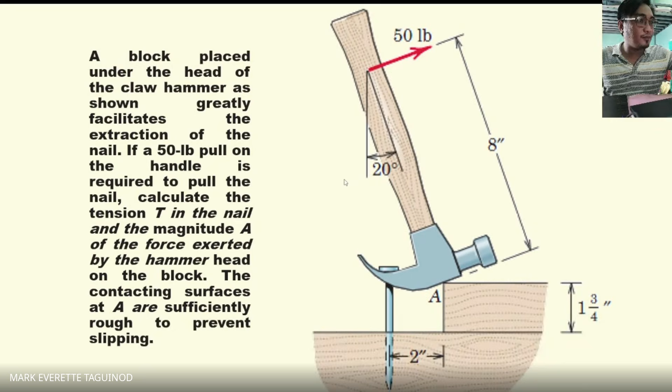Ngayon, let's just continue. Natapos na ba natin 'tong problem na 'to? Did we already finish this problem? Yes, okay. So eto okey na rin ata. Dito tayo nag-last.

Wait lang, let me just move it, nakita na ba? Okay, nandito na yung problem. Ngayon, malamang sa malamang, ang mangyayari niyan, kunyari ito yung quiz nyo, ito yung exam ninyo. Malamang ma-overwhelm na naman kayo dun sa drawing, no? So again, sa mechanics kasi kahit sobrang complicated ng drawing, kahit medyo malabo o mahirap o hindi nyo maintindihan yung drawing, it all boils down to you making or creating yung tamang free body diagram. Kasi again, pag tama ang free body diagram mo, walang magiging problema sa solution mo.

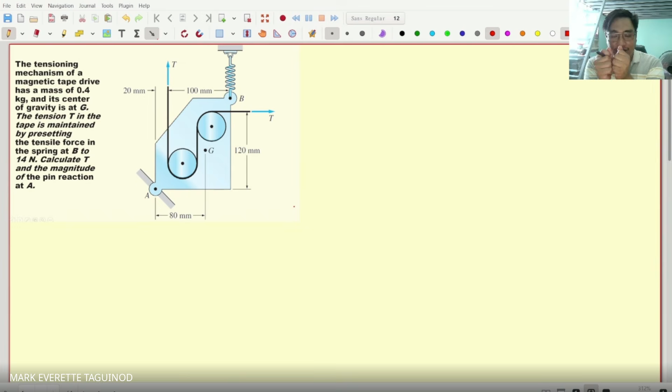Pagka gano'n, sabi niya merong spring dito sa B, so pag meron kasi tayong spring, a spring acts like a cable, pero ang difference lang sa spring at saka sa cable, ang spring meron siyang expansion, meron siyang change in length. Kasi isipin mo ang isang spring pagka binanat mo, it will resist that tension force, pero while resisting it also gives elongation, nag-e-elongate siya. So yun yung tinatawag nating K o yung spring constant.

So pag eto yung problem, let's just replace it with a force that is equivalent or has the same rotation dun sa kanya. Wait lang, palakihin nga natin, patabain natin para mas makita. Okay, so this is my force T, this is my tension or my spring. So tawagin na lang natin 'tong tension or spring tension, TS, tension of the spring. Ngayon sa baba naman meron akong pin dito.

Ngayon sa pin, alam natin pag pin 'yan, the force would be something like this. Hindi natin alam kung anong direksyon niya, pero the best way to do it is to just represent it by its components para mas madaling i-analyze. So now I have an X component tsaka a Y component. So eto, meron akong horizontal tsaka meron akong vertical component.

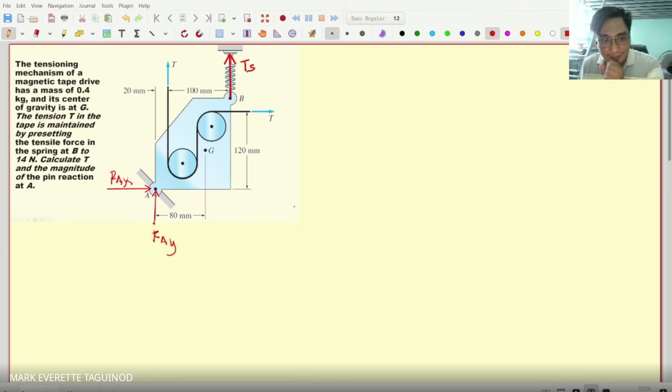Let's just call this RAY kasi vertical, tapos RAX. So yun lang naman, yung tension nakalagay naman na nakalagay na rin dito. So kung bibilangin natin ilan yung unknown, you have 1, you have 2, you have 3 tension, ito parehas lang naman, so that's 3, tapos 4. Pero kung papansin niyo binigay na, may binigay na value. So basahin mo lang ulit yung problem.

Meron tayong hindi pa alam o kulang pa yung equation natin. Pero may sinabi kasi siya dito. Sabi niya, the tensile force in the spring at B is 14 Newton. So para daw magkaroon ng tension T dito, tsaka tension T dito, para maging T na equal sila, yung TS, yung tension sa spring, is set as 14 Newton. So given pala to. So given pala yung tension sa spring na 14 Newtons.

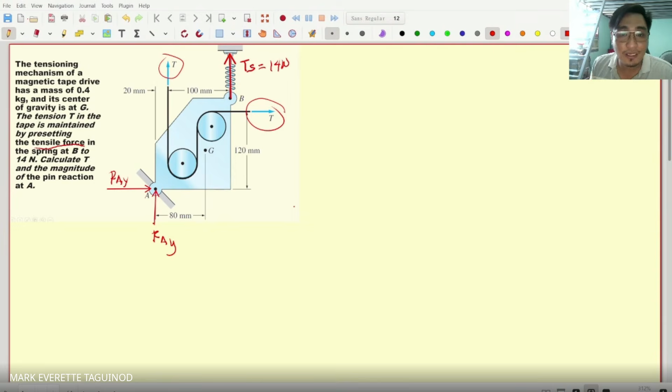So if it's given na 14 newtons ang tension sa spring, ang kailangan lang natin gawin is do the equilibrium equations. Kasi ito na, yung kung anong nasa screen nyo ngayon, palaki natin ng konti para mas makita. Ayan, kung anong nasa screen nyo ngayon, yan na yung free body diagram.

Hindi tinanggal mo yung support, ni-replace mo ng kanyang support reaction. So that's now the free body diagram. Pagka meron na akong free body diagram, it's now as easy as listing what equations that I would use. Punta muna ako dun sa pinaka-basic, summation of forces X is equal to 0, summation of forces sa Y is equal to 0, tsaka meron akong summation of moment at any point, this is equal to 0.

So pag ganyan, tignan natin, bago tayo simulang mag-solve, tignan muna natin kung ano yung pwede nating gamitin na meron tayong masosolve. Kasi kung titignan mo, mag-summation of forces X ako. If I do summation of forces X here, may unknown ako na RAX, may unknown ako na T, so parang hindi pa pwede, dalawa pa yung unknowns ko. Summation of forces Y, meron akong unknown na T along the vertical, meron akong unknown na AY along the vertical. So hindi ko rin masosolve, wala pa akong masosolve gamit doon.

How about moment? If I take moment, let's say at point B. Pag nag-moment ako sa point B, itong tension may unknown, yung RAX meron din siyang moment arm, yung RAY meron din siyang moment arm. So hindi pa pwede, hindi pwede sa B.

Pero what if I take moment at point A? Kasi sa point A, pag nag-moment ako dito, RAX would be passing through point A, RAY would also pass through point A. Therefore, ang moment arm ng RAX at RAY ay 0. So hindi ko na siya isasama sa equation ko. Wherein ang T, may moment arm tong T na pataas, may moment arm tong T na horizontal. So may T dun sa equation ko.

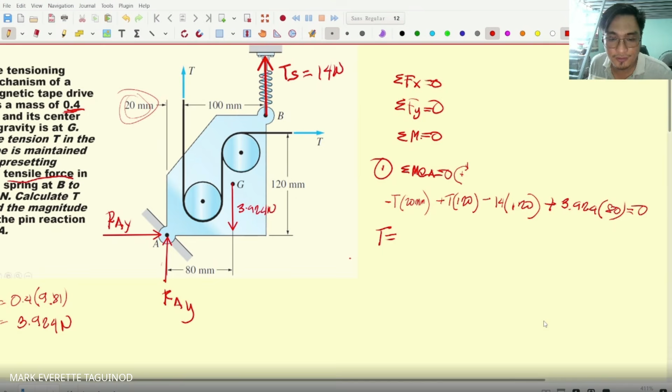Now can someone solve what's the value of T? Calculator nyo na lang, sabay-sabay tayo. Nalabas ko na yung calculator ko. Negative times 20 plus alpha x times 120 minus 14 times 120 plus 3.924 times 80 is equal to 0.

Ano sagot nyo? Anong sagot nyo? What's the answer? Pare-pareho ba tayo? 13 point ano? 13.66. Okay, so this is 13.66, this is newtons. Siyempre kailangan may newton dyan, no?

Okay, answer, that's the answer for the question na T. Mayroon bang kulang? What's the magnitude and the reaction? Anong gagamitin mong combination, yung 2 force or 1 moment? Di check mo na lang. Tapos na ako mag-moment, pag nag-summation of forces X ako, ang unknown ko na lang RAX.

Ibig sabihin gawin ko na yun. Second equation, that is summation of forces along X, this is equal to 0. Ang lalabas dyan, I have positive RAX plus T, this is equal to 0. Wala na, kasi itong T na to vertical, wala yung X component. Itong weight, vertical din, walang X component. Itong TS, vertical din, walang X component.

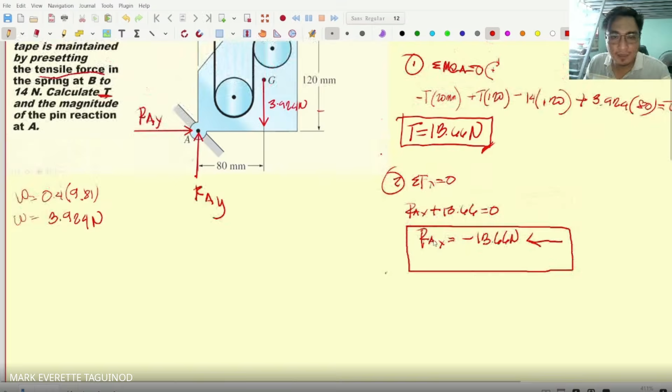Okay, punta na tayo sa kabila. Summation of forces along Y, third equation, this is equal to 0. Ngayon isa-isahin ulit natin. I have positive kasi I assume going up, RAY plus tension 14, yung tension sa spring 14 plus 13.66, tama, going up, then minus 3.924, this is equal to 0.

What's the value of RAY? What's the value here? Negative 23.74. Okay, negative 23.74, this is newtons. Again, since this is negative, this is now directed downwards kasi ang assumption ko going up.

Pero syempre hindi naman ang tinanong niya yung X at saka Y component. Ang tinanong niya ano daw yung magnitude ng mismong pin reaction. Again, this is not the magnitude. Ang magnitude is yung talagang resultant ng dalawa. Ito, kung may RAX dyan, may RAY, hindi yan yung totoong force dyan. The real force acting on the pin is this resultant of RAX and RAY, let's just call that RA.

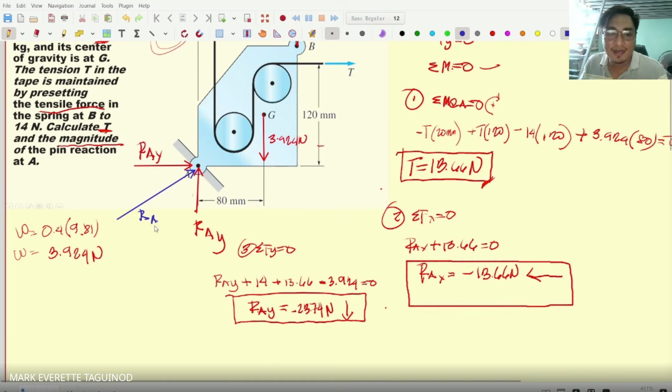Ngayon para masagot ang RA, kayang-kaya nyo naman na yan, square root ng 23.74 squared. Kahit negative yan, negative squared is a positive number, so hindi ko na ilalagay 13.66 squared. And the real reaction force na nangyayari sa pin A, which is included na yung dalawa, which is equal to ano?

27.33, tama ba? 27.30, hindi pala, 27.39. Okay, 27.39 newtons. Okay, so that's the answer.

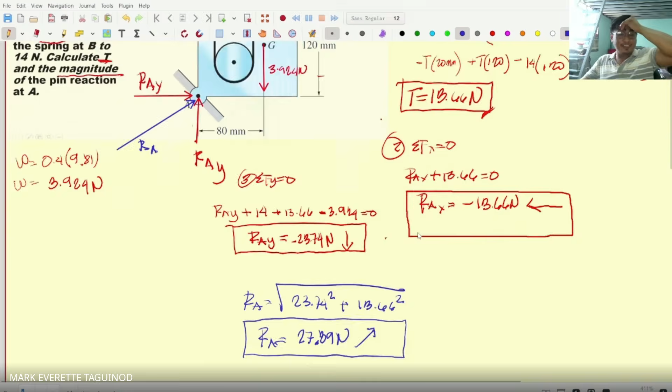Yung direction niya, pa ganyan. Hindi naman tinanong yung theta, so okay na yan. Pero lagay pa rin natin para sigurado. Theta is equal to tangent inverse ng opposite. Kunyari, ang theta na gagamitin natin is this theta, along the horizontal, RAY over RAX.

23. Sir, hindi po ba pa-southwest yung direction nung resultant? Ay, oo nga, my bad. Tama, pala mali pala yung assumption natin.

23.74, 13.66. Ano to? Tangent 23.74 over 13.66. Okay, 60.08. Mamaya i-zoom out ko para i-ano nyo. 60.08 degrees, and this is south of west.

South of west. Downwards to the right, to the left, south of west. Oh, answer. Zoom out natin para makita niyong lahat. Tapos yan.

Okay, so again, like I said, kahit sobrang komplikado ng drawing, kahit mukhang tanga yung drawing, di mo maintindihan, all you need to do is to basically first do the free body diagram. Pag nagawa mo yung tamang free body diagram, it's again as easy as doing yung equilibrium equation mo. Kasi yun nga, sobrang importante talaga ng free body diagram. Kasi kahit tama yung equation mo, kung mali to, mali yan.

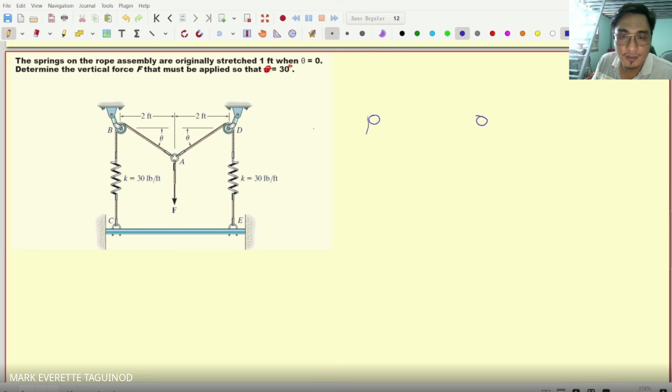Okay, so ngayon, imagine nyo, di ba? Dati, ang itsura daw niya bago mo lagyan ng force, so kung ito yung dalawang roller, tapos yan, may spring siya dito. Ito, hindi kailangan, tapos meron siyang beam dito. Tapos dito, meron na naman siyang spring, may beam siya dito. Tapos dati, straight lang siya. No? Siyempre, pag theta is equal to 0, yan, horizontal na lang yan.

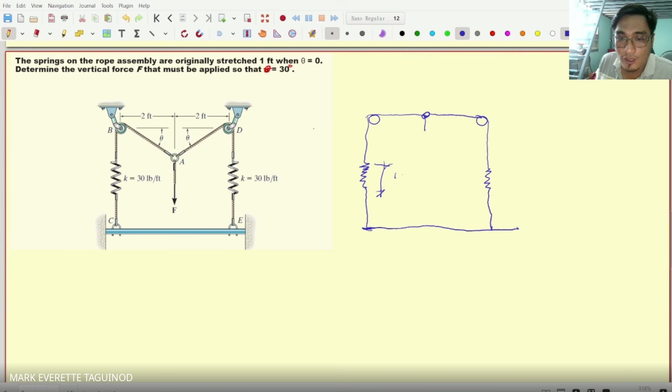So yung roller daw natin nandito. Tapos merong nakasabit, pero wala pang F, no? 0 pa lang yung F. So sabi sa kanya, eto, dati na daw, ibig sabihin, meron na daw original stretch na 1 foot to, no? Ngayon, ano ba ang meron sa spring?

Ang spring kasi, meron tayong tinatawag na spring constant, K. So K is your spring constant. Ngayon, ano bang ibig sabihin ng spring constant? All you need to remember, kasi ito, di ba, napag-aralan nyo naman na yung spring constant nyo nung physics, no? Ang spring constant, it is the force per deformation of a spring. So pag sinabi mong 30, let's say this example, ang sabi niya, 30 pound per feet. Ibig sabihin, habang ini-stretch mo siya, pag ini-stretch mo siya ng 1 feet, ang magiging deformation niya or ang magiging force na kailangan mo para stretch mo siya ng 1 feet is 30 pounds.

So that's what 30 pounds per feet means, that's the spring constant. And the formula to get the spring constant is K equals the force applied divided by the change in length. So if I have the change in length and the spring constant, I can solve for the force being applied by the spring. Otherwise, if I have the force and the spring constant, I can solve for the deformation. So if you're given any two of these, you can solve for what is unknown using what you know from the spring constant.

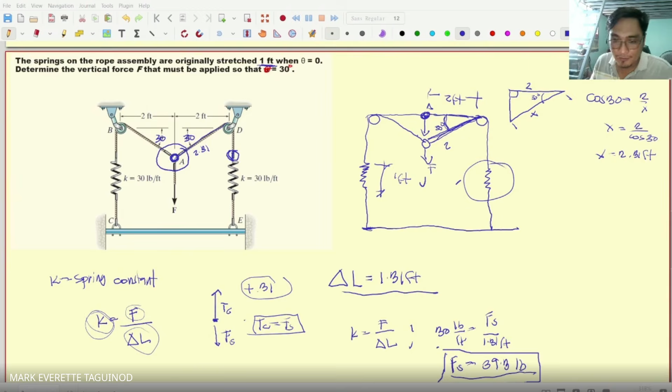So for example, dito, instead of analyzing the whole structure, eto, analyze ko yung buong structure na yan. Imbes na yan, para makita ko yung F, ang gagawin natin, i-analyze ko etong ring na to. Tama? This ring at A. I will isolate that ring at A, and check the forces that are acting dun sa spring na yan. You can do that as long as you still consider all of the forces that are acting on that ring, at that ring. So let's isolate yung ring na yan. For example, ulitin ko na lang ng konti. Isolating, if I isolate, so yung ko yan. Okay.

Isolate ring A. If I isolate ring A, this is it, right? This is ring A. I can consider ring A as a particle so I don't need to consider its size or shape.

So for ring A, what are the forces acting on it? First is this tension here, given as F. That's what we're solving for. So we have force F. Let's just call this force F.

Aside from force F going down, I also have two tensions, and this is the tension of the cable. This tension cable is also equal to Fs. So let's label this Fs. Remember this, okay?

This is a very important concept for you to understand in mechanics: isolate only the objects that you need, because it's not always necessary to consider the full structure.

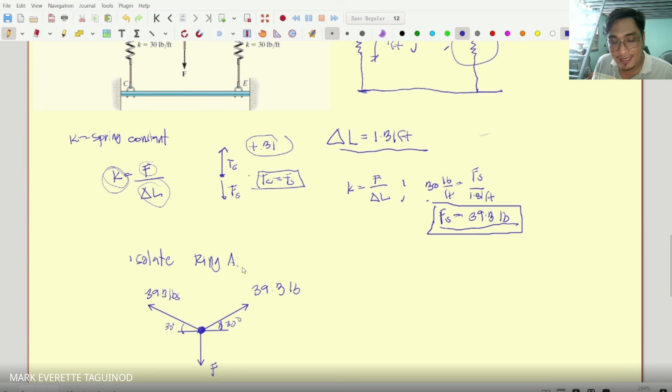So I didn't need to consider the whole structure. What I did was isolate ring A only, because by isolating ring A, I get a force system like this, and looking at this force system, I can now solve for F.

Let's solve for F. Summation of forces along Y directly, since F is the only unknown there. F is equal to, let's arrange it: negative F

plus 39.3 sine 30 plus 39.3 sine 30. Is there anything else? No more. So this is equal to 0. So what's the value of F?

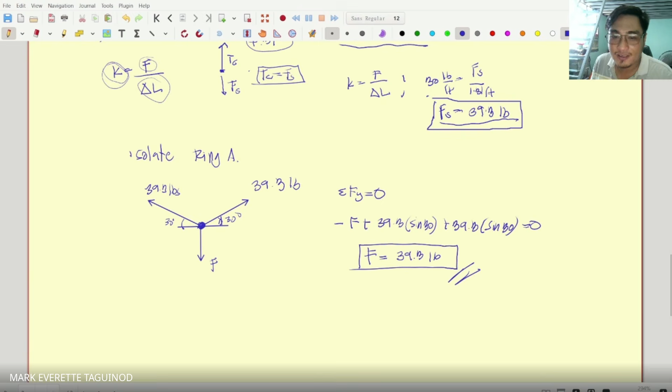So this is now the answer for F. You need to pull, meaning I need to apply a force of 39.3 pounds on this ring so that it goes down and creates an inclination of 30 degrees.

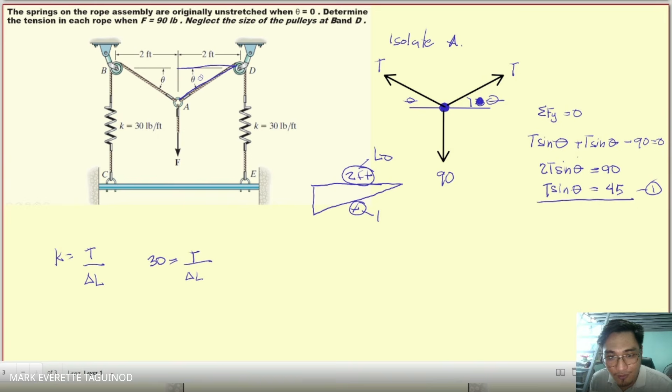So now, what is the change in length? We couldn't do that earlier, right? The change in length of the spring - there was zero change when it was horizontal, now it's here. So if I draw that, same as what we did earlier. If I draw this triangle here, this is 2 feet - that hasn't changed. This is the original length, LO. And let's call this LX, and this is now my final length. And you know that the change in length, right?

What's the formula for change in length? How can we solve for the change in length, knowing this? Change in length is just the final length minus the original length, right? Change in length means the pagbago, the final minus the original.

So now let's solve for this L. This LO, I know is 2 feet. This LF is what we need to get. I know that this is theta. So this X can be computed as 2 over sine or cosine? What is this, sine or cosine? Cosine, sir. Cosine. Okay, this is 2 over cosine theta.

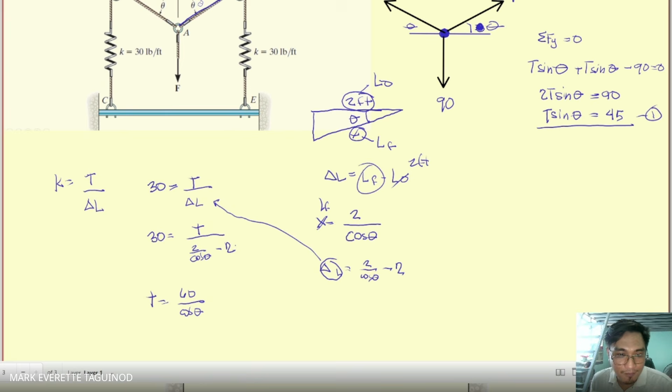So now, substituting this value of x, since this x is also the final length, substituting it into this equation, we get delta L equals 2 over cosine theta minus 2, because the original length is 2. Now I will substitute this delta L into the other equation. 30 would be equal to T over 2 over cosine theta minus 2. With a little manipulation, T equals 60 over cosine theta minus 60, multiplying the 2 into the 30. So this is my equation for T.

This is now the equation for T. Let's call this equation 2. Now notice, this T is in terms of theta. You also have another equation with T and theta. So if I substitute this T here into that equation, I will have a single equation with a single unknown, theta.

So it becomes T equals 60 sine theta over cosine theta minus 60 sine theta. This is equal to 45.

So now that you have this equation, can you solve for theta here? Using what? What will you do to solve this? Shift solve, sir. Shift solve. Okay, sige, shift solve. Go ahead.

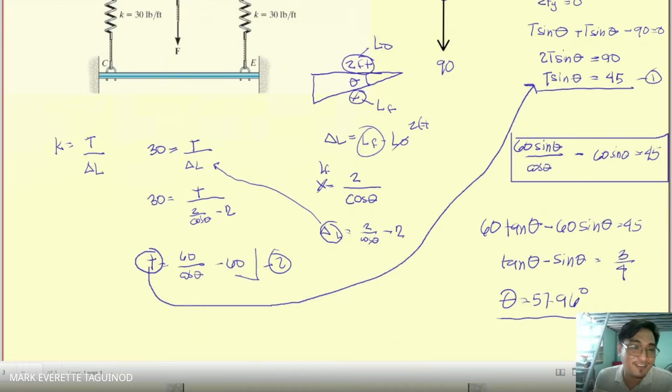The question asks for the tension in the rope. So for the tension in the rope, you have the formula - we already got an equation earlier. T sine theta, this one, equation 1. That's what we'll use: T sine theta equals 45 degrees. So if I substitute theta here... 45 degrees, wait why 45 degrees? Just 45. T equals 45 all over sine 57.96. What's the value of T?

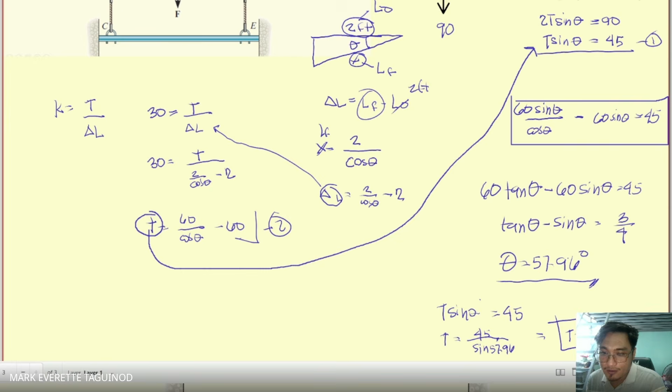53.09. This is in pounds. This is the final count, the final answer.

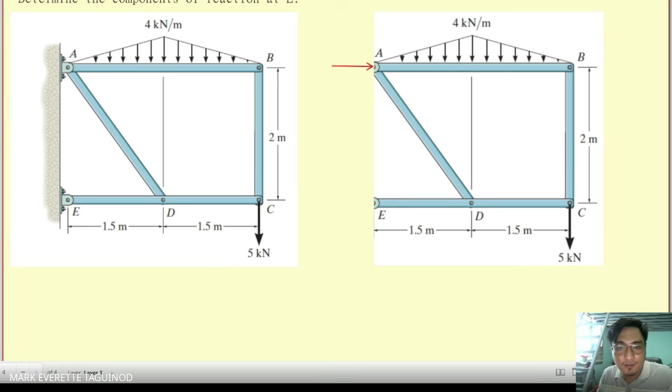So at point A, since this is a pin, I already know there's automatically a reaction. What's our assumption here? Let's point it upward. Wait, is there any way to make this color transparent?

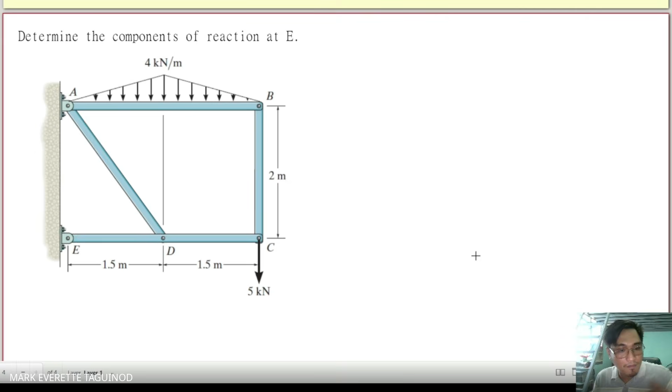So this is my support. I removed this, this is my whole body. If I consider the whole structure, considering the whole structure—wait.

I have a pin at A, so the free body diagram has a pin at A with a vertical component and a horizontal component. Then there's also a pin at E with a vertical component pointing up, and a horizontal component pointing right.

Okay, so I'll call this RAX, this is RAY, this is REX, then REY. Ray and Rex.

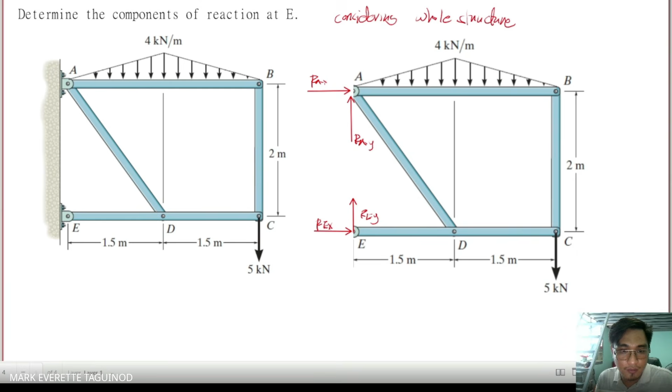Let me set this up first. So if you imagine, for example, this is my beam. If this is my beam with no internal support, its only supports are these two fingers of mine—let's call this pin A and pin B. If this beam is supported by these two pins, that means it has vertical and horizontal reactions at each.

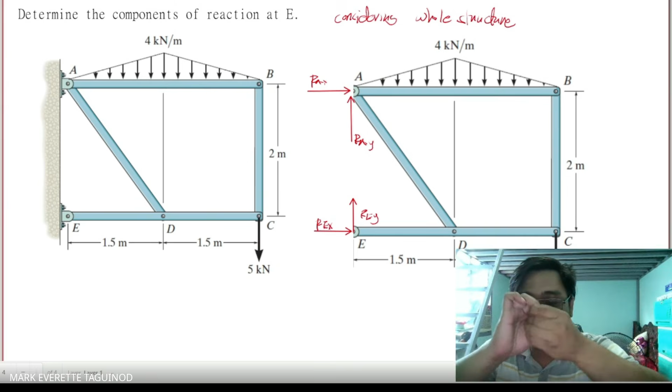It has an internal support, let's say it's pinned here. If it's pinned there, that means inside it, it can rotate. It can rotate. But it will prevent the pulling, it will prevent up and down movement. So that's an internal pin.

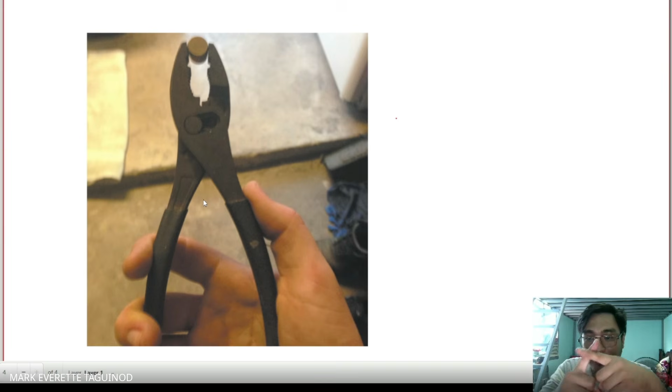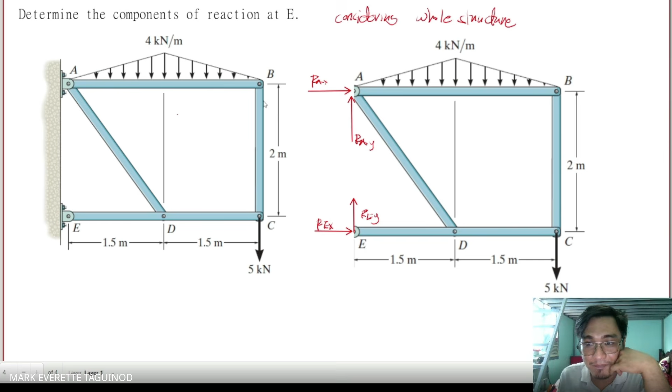So that's an internal pin. When we say structure, let's look at our structure which has beam AB and beam BC - two beams. These two beams, beam AB and beam BC, are connected through an internal pin. That internal pin connects those two supports, or connects those two beams. It connects them, but the problem is it cannot resist rotation.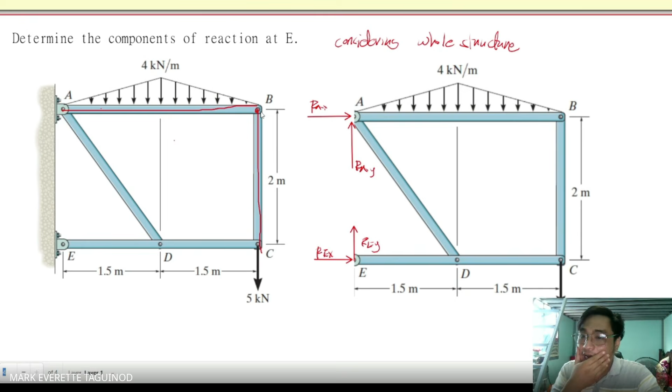So for this one I can't solve directly, but let's just isolate AB. Let's say I isolate AB - so for AB, here it is. This is AB. Since there's an internal pin at B - this is the internal pin at B, this is point B - since it's a pin, it can resist vertical force, so it has what we'll call BY. It can also resist horizontal, so it has BX. But the moment, it cannot resist, so it has no moment.

So I can isolate AB, because when I isolate it, it has resistance at BX, resistance at BY - that's all it has, no moment. Then at A, of course you have a reaction there too. So with that, we can use the help of this internal pin to solve for any reactions using what we know about it.

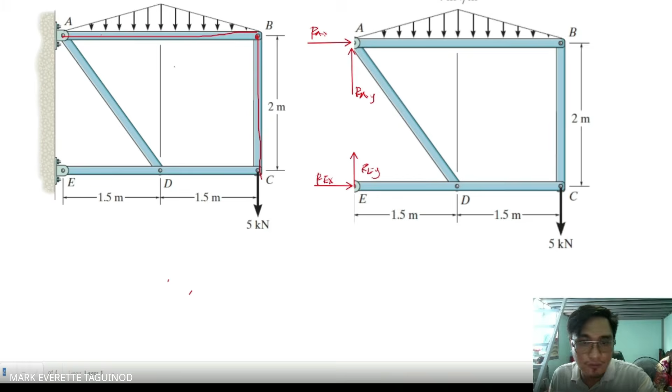So para mas maintindihan nyo, balikan na lang natin tong problem na yan. Baka mamaya masyado mabigla kayo, ayoko namang nabibigla kayo. Let's just say, eto yung beam natin, tapos eto yung problem natin.

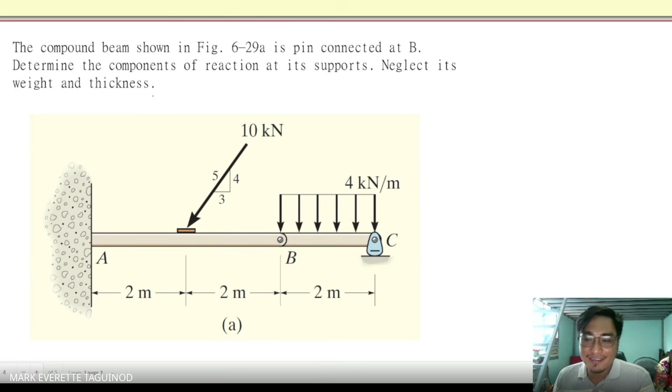Okay, kung papansinin mo sa beam na to, nakikita nyo na ba? Do you see the beam here? Kita nyo ba siya, guys? Okay, so eto, you have a beam here.

Kung titingnan mo, if we do the free body diagram of this beam, ang tanong lang niya, it is pin connected at B, tapos determine the components of the reaction at its support, neglect its weight and thickness. So ano yung reaction sa A, reaction sa C, kasi yun yung tinatawag natin external supports. Ngayon we are digging into the internal supports, which is nakikita nyo sa B.

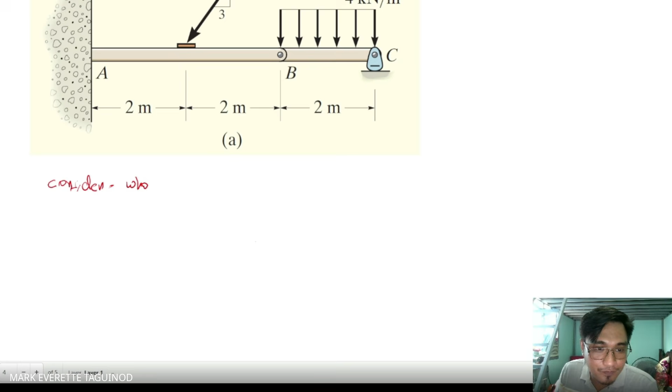Hindi ko pa alam kung anong internal supports. Kung ako ang gagawa ng free body diagram, let's consider the whole structure. Ang free body diagram, syempre lagi namang free body diagram ang una. The free body diagram would look like this.

Tapos meron daw siyang pin dito sa B. So ito, this is point B, point C, tapos point A. Ngayon meron daw applied force here. Okay wait lang, let's just draw everything correctly before we start. Tapos ito daw ay 3, 4, malamang 3, 4, 5 yan. This is 3, this is 4, this is 5.

Tapos dito daw may distributed force, tama? Okay, so distributed force. This is, what did they say about this? 4 kilonewton tsaka 10 kilonewton. So this is 10 kilonewton, 10 kilonewton, tapos ito daw ay 4 kilonewton per meter. Tapos the distances, ito hanggang dito is 2, tapos dito hanggang dito is also 2, this is meters, this is meters, this is meters. These are all my applied forces.

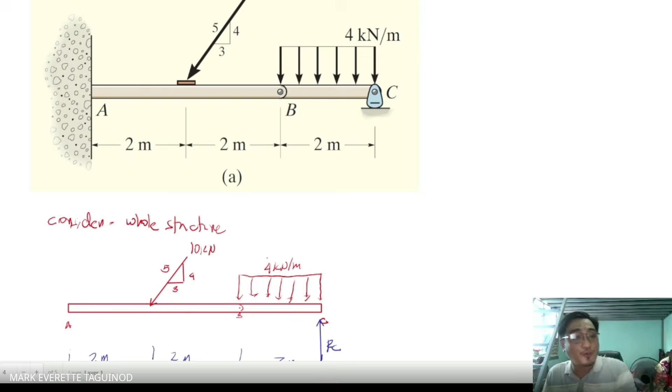So this is RC. Dito naman, what type of support do we have at A? Anong klase ng support yan? What do you think is the... Fixed po, sir. This is a fixed support. Pag fixed support, pipigilan niya ang vertical movement, pipigilan niya ang horizontal movement, and it will also hinder yung rotation.

So pagka ganun, ibig sabihin, meron akong vertical reaction, meron akong horizontal reaction, tapos meron din akong moment. Again, lahat ng mga direction ko ngayon, assumption lang, no? So this is MA, moment at A. This is reaction A along the horizontal, X. This is the reaction at A along the vertical, Y.

Kung titignan mo na naman yung structure mo, kung ito yung structure mo, ilan ang unknowns mo? You have 1, 2, 3, 4. So kung apat yung i-consider mo lang, you cannot solve for the problem.

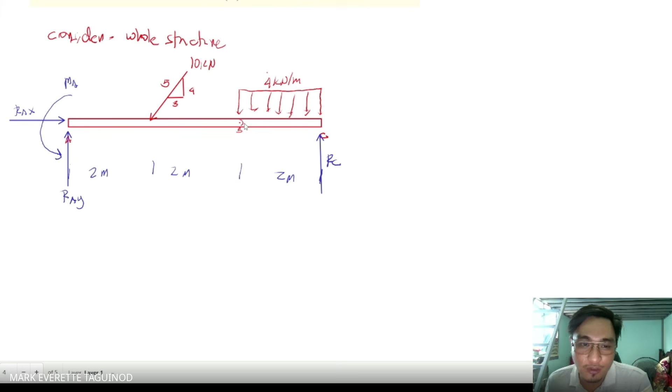So ngayon, gagamitin natin yung alam natin tungkol sa B. Ano bang alam natin tungkol sa B? Pag in-isolate ko yung member BC, kasi this is a compound beam, no? Pag in-isolate ko yung BC, this is the, wait lang, yan. So now, what we do is what if we isolate beam BC? Pag BC lang yung kinonsider ko...

Wait lang, let's just make a rectangle here. Ito, if this is a rectangle here, sa C, ganun pa din, no? So kumbaga, ang literal na gagawin mo dito, putulin mo yung structure, tapos kung saan yung putol mo, yun lang yung i-consider mo. Let's say ito yung pin na B, sa B ka magpuputol, you will only consider the structure from point B until point C. Kasi bakit ko dun gustong gawin? Kasi alam ko na walang moment sa point B.

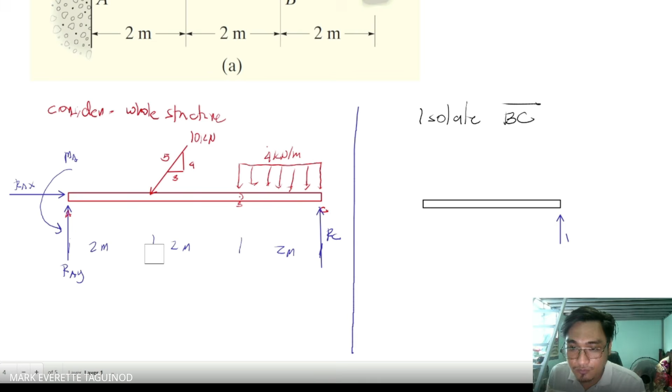So meron ako dito, let's just draw an arrow here, then color blue ulit. Yan, tama. So eto, hindi pa rin mawawala, nandun pa rin. So eto, this is still RC. Tapos dito, sa buong BC, meron pa rin yung 4 kilonewton. So kung saan yan, doon pa rin, so merong 4 kilonewton per meter. So red pala gamitin natin dito para mas kita.

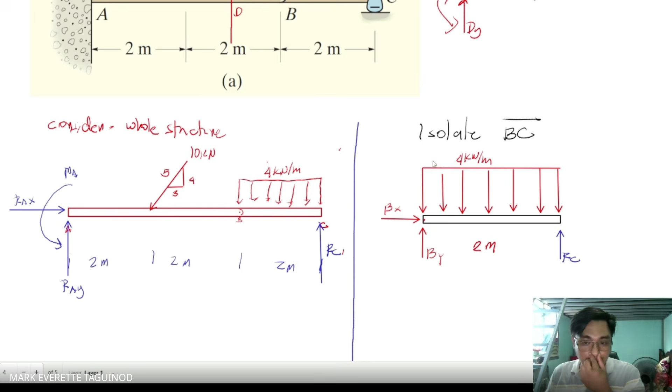Okay, may tanong ba kayo? Saan na yun? Ito pala, wala. May tanong ba? Wala naman, sir, sige lang. Sir, bakit walang RCX? Saan?

Bakit walang RCX? Kung papansinin mo yung problem, sa C, this is a rocker support. Ang rocker support, parang nakapatong lang siya sa beam. Kaya niyang pigilan yung movement niya down, pero hindi niya kayang pigilan yung horizontal movement. So meron lang support sa vertical, wala sa horizontal, kaya wala yung X component ng RC. Pero sa B, meron, kasi yan ay pin, kaya hindi rin kayang gumalaw horizontally, pero yung rotation, pwede.

Okay, para mas maintindihan, let's continue solving. From this point, parang normal na beam na lang siya. If I do summation of forces along X equal to 0, BX is equal to 0, kasi wala naman siyang kasamang iba. BX positive, tapos wala na. That's equation 1. Tapos if I do summation of forces along Y equal to 0...

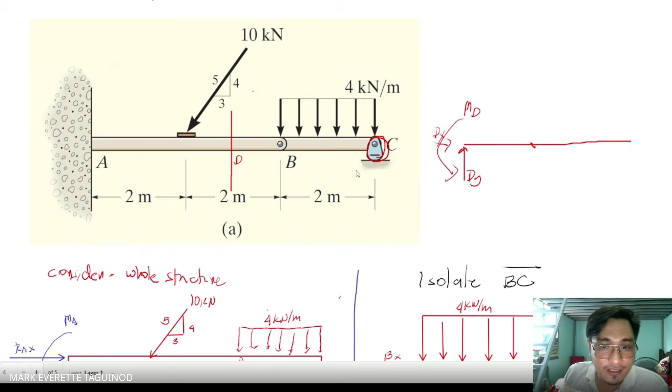Ngayon, paano naman yung mga in-isolate ko, sir? Siyempre, kung yung buong structure hindi gagalaw, pag in-isolate ko yung BC, assumed na rin na hindi siya gagalaw. So I will still consider it equilibrium. The best way, pero hindi ito foolproof, ang most common way ay pag tinanong sa inyo ng reactions or tension, what's the support reaction, what's tension, that means equilibrium equations o equilibrium problem yung meron sa inyo.

Sir, pwede yung answer na may answer? Sige, sige, bigay ko sa inyo, tapos sagutin niyo, tapos sabihin ko kung tama o mali. May answer, basta walang solution. Kayo na ang bahalang bigyan ng solution, siyempre check niyo na lang. Gawan ko ng answer, pero kayong bahala sa solution.

Anyways, okay, let's continue, sir, para matapos tayo ng 3:30. Lo, 2 hours na pala tayo. Sakto lang pala, diba overtime? Anyways, tapusin na natin.

Okay, so dito, syempre meron ba akong moment, yung isolation pa rin, I'm still considering member BC, isolating member BC. So if I take moment at point B, this is equal to 0. Pag nag-moment ako dito, ang magiging unknown ko na lang itong RC, kasi ang moment arm ng BX ay 0, at ang moment arm ng BY ay 0 rin. So I can take moment at point B, yun na lang po ang kailangan kong gawin. Okay, so if I take moment at point B, RC muna, positive or negative?

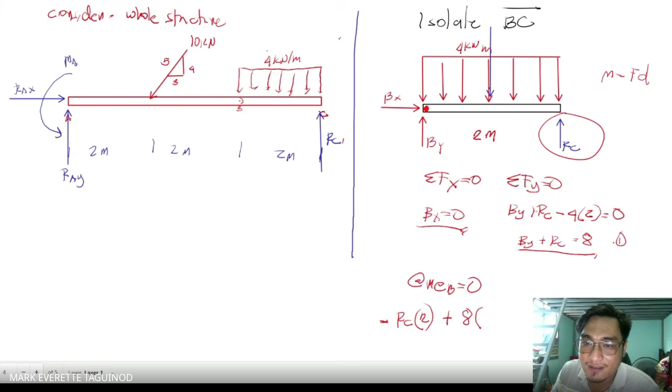Quantity, anong distance niya? Anong moment arm nung 8 sa point B? 1, sir. 1. Bakit 1? Kasi ang resultant laging nasa center of gravity. Pag rectangle yan, ang center of gravity mo pag rectangle is nasa gitna. So let's say, ito yung gitna. So ito, this distance is just 1 meter. So ito yung kanyang resultant which is just equal to 4 times 2 which is 8 kilonewton.

So yung blue, yan yung resultant ng red. So 8 multiplied by, bakit yan? 8 multiplied by 1. So yun lang, no. That's how you analyze yung mga distributed force, especially sa moment. Huwag niyong kakalimutan yung moment arm, no.

So parang nung quiz nyo lang din naman yan. This is wala naman na. This is equal to 0. What's the value of R? 4. Tama? 8 times 1 divided by 2. This is R. RC

is equal to 4 kilonewton. Okay? So now, if this is 4 kilonewton, nakuha mo na RC, isa na rin sa tanong, no? Kaya binax ko na siya. Kasi external supports ang R. So binax ko na siya, no? This is one final answer.

So ngayon, sir, ano nang susunod natin? Ngayon, kung babansinin mo, if I now already solve for RC, pwede ko na i-solve yung BY actually. No? Kasi from this equation, BY is equal to 4 na rin. Bakit? Kasi substitute mo yung RC 4, 8 minus 4, BY is equal to 4. So masasagot mo na yung BY.

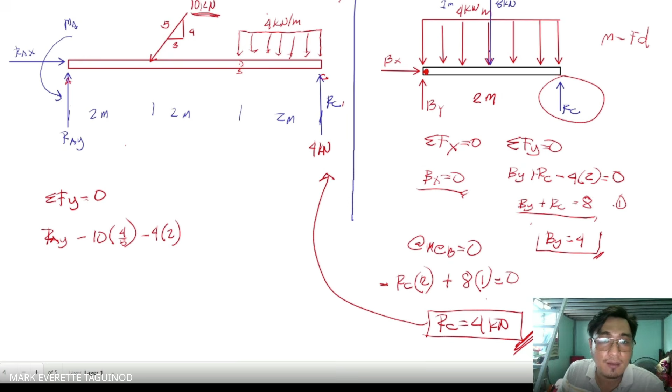Solving. Summation of forces along Y, this is equal to 0. Tama? If I do that, I will get positive RAY minus yung 10. Tama? Ito, yung 10, this 10 here. Minus 10 times 4 over 5 minus 4 times 2. Tama? Ito naman siya, 4 times 2 plus 4 kilonewton or 4 na lang para ano. This is equal to 0.

So now, what's the value of RAY? This is 8. This is 8, 16. Di 12 ba siya? RAY is 12. Tama ba? 12 kilonewton positive. Going up na rin siya.

Ay, may kulang pala dito. You should always indicate the direction here. Positive. Tama ba siya, guys? Tama ba? 12?

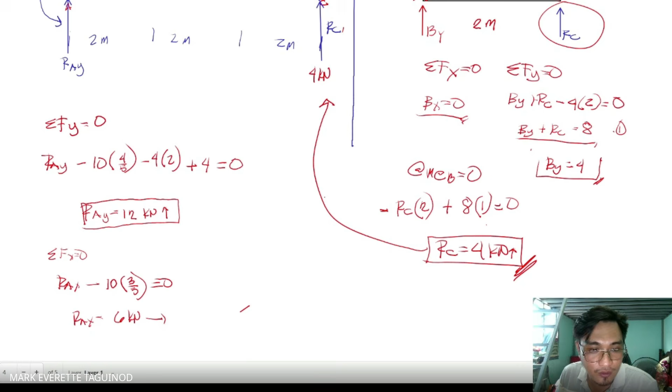Okay, so now if I do summation of forces X, summation of forces X is equal to 0. Pag nag-summation of forces X ako equal to 0, I only have RAX minus, positive, assumption ko, minus eto, the X component ng 10 kilonewton, which is just 10, kasi going to the left, minus yan, times 3 over 5. This is equal to 0 kasi wala naman na, ito vertical lahat, ito vertical lahat. So this is RAX is equal to positive 6 kilonewton. This is going to the right pa. Tama yung assumption mo.

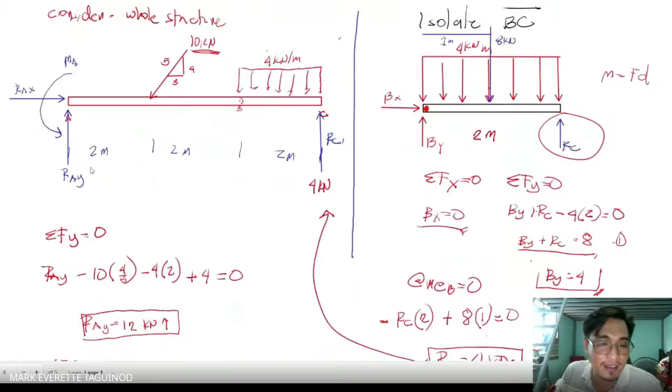Okay, answer. Now the moment naman. Yung moment ko naman, at this point, it would be as simple as taking moment at point A. Kahit saan ka mag-moment, makukuha mo yung MA. So taking moment at A, doon na lang kasi yun yung pinakasimple. Summation of moment at A, this is equal to 0. So if I take moment at point A, eto siya.

Let me just copy this para ilagay ko sa baba para makita nyo habang ginagawa. Control C, Control V. Let's just put it here para may basis tayo. So if I take moment at A, syempre this is still equal to 0.

So if I take moment at A, ang unang papasok itong MA. Tandaan nyo, pag moment yan, wala ka ng moment arm kasi automatic moment na siya. So ang assumption ko, counterclockwise yan, di ba? So this is negative MA.

Ito naman, yung 10 kilonewton, pwede ko itong i-break down ng kanyang X and Y component. So yung 10 kilonewton na yan, meron niyang Y component na 10 times 4 over 5, which is 8 kilonewton. Tapos meron niyang X component na 6 kilonewton. Tama? So papansinin mo yan, yung X component niya, it will pass through point A.

So ibig sabihin, walang moment arm yung 6 kilonewton. Yung 8 kilonewton, yung Y component niya, meron. So yun lang yung papasok. So 8 kilonewton, multiplied by negative kasi pag nag-rotate, positive pala dapat, no? Positive kasi ang rotation niya ay clockwise. So plus 8 multiplied by the moment arm 2.

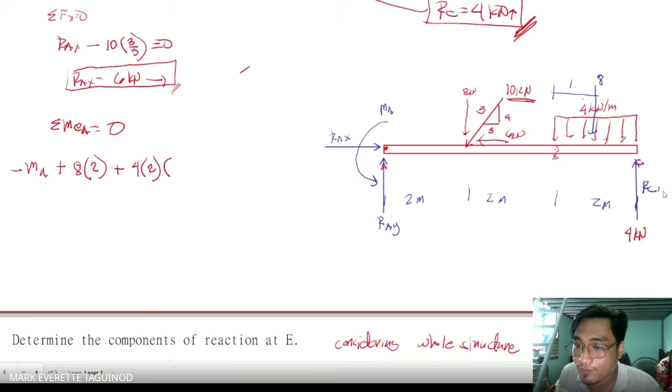And the moment arm, anong moment arm ng 8, ng 4 times 2? What should we put as the moment arm? Anong moment arm niya? Can someone tell me? 5, sir. 5. Bakit 5? Kasi this is just the distance from 8 hanggang dito sa A, which is 2 plus 2 plus 1. Okay, that's 5. So 5.

This is, meron pa? Meron pa, minus. Bakit? Kasi itong RCY ko, it rotates counterclockwise. Tama? Ayan, it rotates counterclockwise. So this is RC multiplied by moment arm mo is 6. And RC is just given as, already solved, as 4. This is equal to 0.

So now, can someone calculate the value of MA? Anong value ng 32, MA? 32, sir. 32. Okay, 32. Positive, negative? Positive, sir. Sige, positive 32 kilonewton meter. Since positive, ang assumption ko na counterclockwise, tama siya. So counterclockwise siya. Okay, that's value of MA.

So ayan, important things to remember, you're not limited to solving a problem considering na lang yung buo. Pwede kayong mag-isolate like what we did here. So pwede nating i-isolate muna yung BC para masolve yung RC. Then when we solve for RC, balik tayo sa whole structure, masosolve na natin yung RAX and RAY and MA.

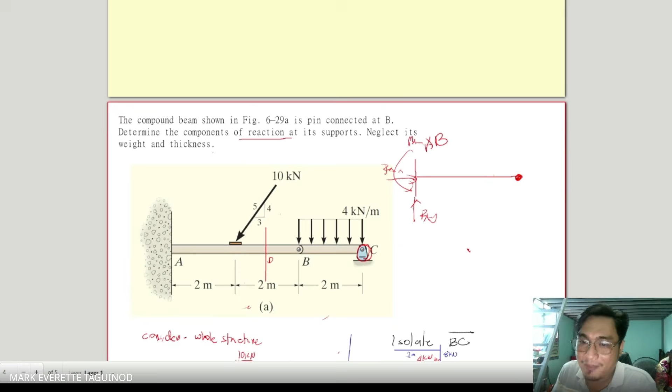If I isolate member AB, isolating member AB, syempre meron pa rin yung RAY, meron pa rin yung RAX, tapos meron pa rin yung MA. Ngayon, sa B naman, tandaan nyo to. Sa B, kanina, ang assumption ko, BY tsaka BX, up tsaka right.

Tama ba? Nakuha ko na rin na tama na up, tama na wala naman yung BX. Ngayon, sir, what if ito ang in-isolate ko? Since assume ko dito na going up, from the law of action and reaction, tama? Every action has an equal. So, kung kanina sa B, considering left and right, ay considering right, ito sa BC, meron akong nakuha na value ng BY, which is 4.

Dito naman, when considering the left, dapat yan, meron siyang equal. So, meron akong BY na 4 kilonewton, kasi 4 kilonewton yung na-compute ko dito. Ito, 4 kilonewton to. If this is 4 kilonewton, this must also be 4 kilonewton, equal. Pero, it must be equal and opposite. So, imbes na pataas, dapat dito pababa.

Tama? Kasi pag pinagsama mo siya, diba? Kung isipin mo, etong part na to, pag binalik mo na tong BC tsaka AB, pag pinagdugtong mo na siya, yung dalawang yun magka-cancel out na lang. Kasi may pataas ka na BY, may pababa ka na BY, same sila na 4 kilonewton. So, ibig sabihin, walang magiging resultant yan. Kasi, hindi naman siya external.

Okay? So, sa problem na to, hindi natin ito kailangan gawin kasi I can just go back to my original structure. Pero, when you do another type of problem na kailangan mong, after considering isolating BC, you are needed to isolate AB naman, pagka ganon, kung na-solve mo na yung BY dito, syempre, yun na rin yung value ng BY dito.

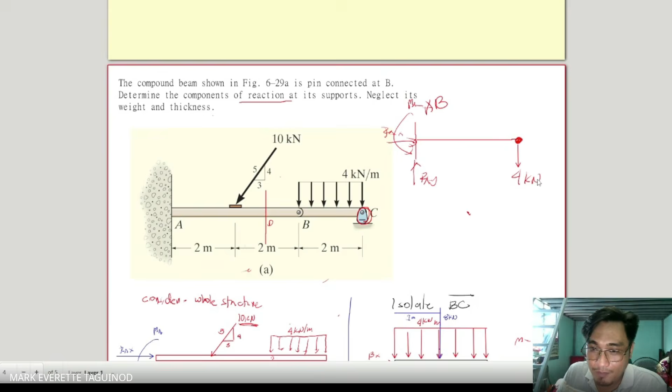Pero, that BY, instead of this one na going up, syempre, opposite, parang third law, di ba? Action, reaction. Kung ito pataas, ito bababa. So, isipin nyo na lang. Let's just say ito, no?

Kung ito yung pin na yan, kung isipin mo, pag tinanggal mo to, ang iisipin mo kasi, ano yung reaction, ano yung ginagawa ng member na to dito sa member na to. Tama? Kunyari, this is member A, this is member B. Pagka iisipin mo, pag tinanggal mo yan, ang kailangan mong i-consider, what is the effect of member A dun sa member B? So, tinutulak niya pataas. So, kung tinutulak ng member A, yung member B pataas, kung ang member A naman ang i-consider mo, ang perspective ng member A is tinutulak ng member B ang member A pababa. Kasi ang tulakan nila, ba ganyan?

Di ba? Kung ito, yung left side, tinutulak siya pababa nitong right side. Pero kung i-consider mo naman tong right side, tinutulak siya pataas ng left side. So, that's why meron tayong equal and opposite reaction dito, no? So, pag binalik mo siya, magka-cancel out lang sila. So, yun.

In this case kasi, sa problem na to, hindi natin siya nagamit. Kasi hindi natin siya kailangan. Pero pag kailangan mo siya, i-consider yung isolate mo ang AB sa problem na to. That means, kung anong makukuha mong value ng BY dito, that's the same value here. Pero, it has the opposite direction. Kasi they are, yung dalawang yan, under equilibrium.

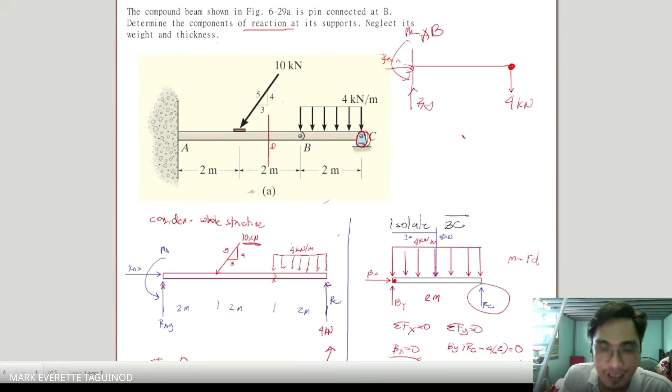Bye, Sir, sir! Sir, wait lang, sige. Okay. Sir, may tanong ako. Wait lang, i-stop ko lang yung record para sa mga nanonood sa YouTube. Yung kayo, sabihin ko pa. Okay, bye-bye. Anyways,